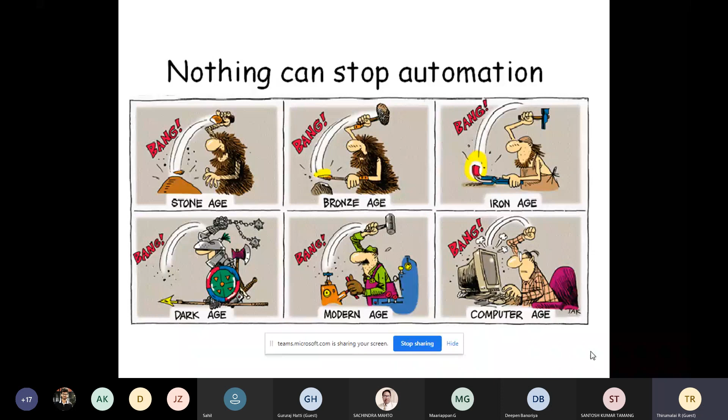And we are going to see what is meant by sustainable manufacturing, which is also called by the name green manufacturing. When we speak about green manufacturing, the combination of green machines, green manufacturing process, green products, and clean power — the combination of all these things will come under a single term, which is called green manufacturing. This green manufacturing is also given other terms, called eco-facturing or eco-manufacturing.

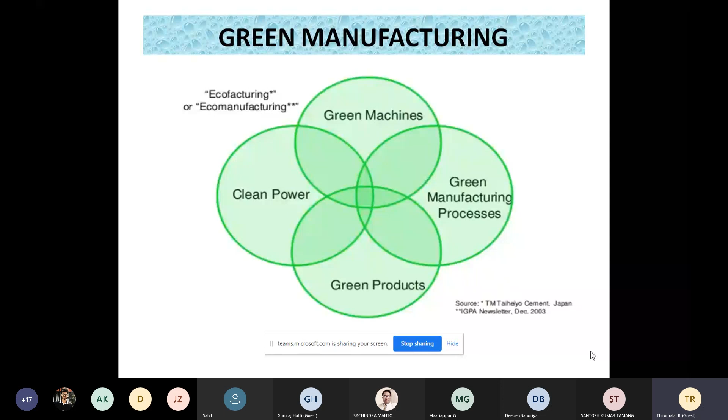So here the sustainable manufacturing concept comes into the picture, which stands on three different pillars. The first pillar is the social pillar, the second one is the environmental pillar, and the third one is the economic pillar.

When we speak about the economic pillar, we should see how far waste management is taken care of in manufacturing industry, how energy consumption is being done, and in what way we can reduce the manufacturing cost so that we can improve the manufacturing process.

When we see about the social factors of sustainable manufacturing, it speaks about the operational safety of an employee working under the industry, and we should speak about the personal health, how far it is being improved or taken care of by the industry for the employee.

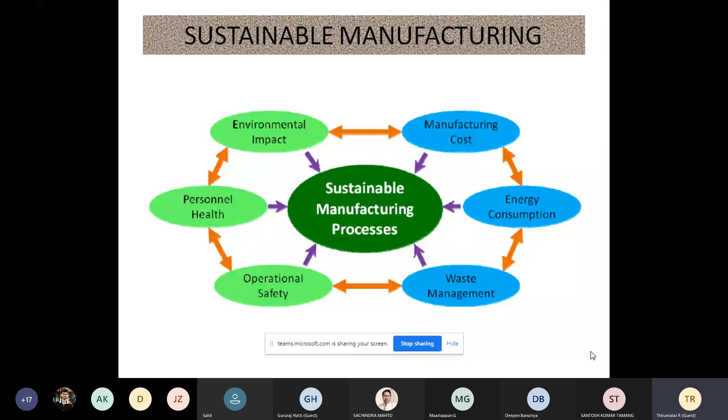And then finally, when I speak about the environmental impact, it will also have a higher impact, higher influence on the sustainable manufacturing process.

Then we will find out what is the concept of sustainability and sustainable manufacturing. So sustainability stands on three different pillars: one is the social pillar, second is the environmental pillar, and third is the economic pillar.

The sustainability process will provide less damage to the environment. It will pay more attention to society, and it provides economic benefits also. So everything we are taking from the earth, we are going to leave it to the earth also.

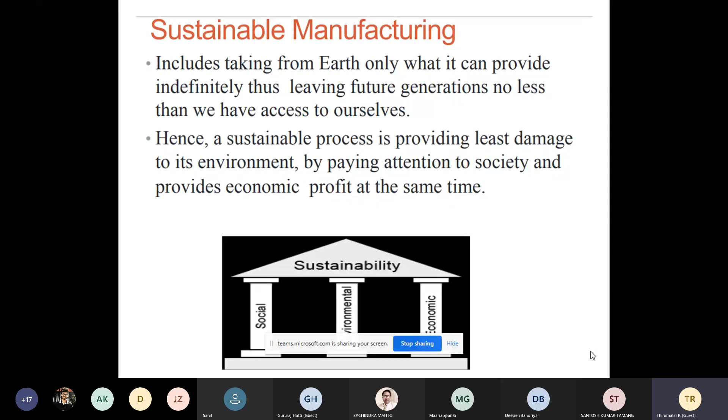So we should be concentrating on three different factors to achieve sustainable manufacturing. The first one is social manufacturing, the second one is the environmental factors, and the third one is the economic factors we are going to concentrate on.

This is the evolution of sustainable manufacturing. We can find how far sustainable manufacturing has evolved from its existence. Traditional manufacturing started in the year 1980, and the process of manufacturing started from there.

It started in the year 1980, and in its process we can find only a gradual growth. In all these things, manufacturing phenomena in several aspects took place. It started from turning, machining, milling, until the concept of smart manufacturing, CNCs, automations - everything is taken into consideration.

After traditional manufacturing is taken into consideration, there comes the concept of lean manufacturing. When I speak about lean manufacturing, we always concentrate only on waste reduction techniques - how we can reduce the waste so that we can improve the environment.

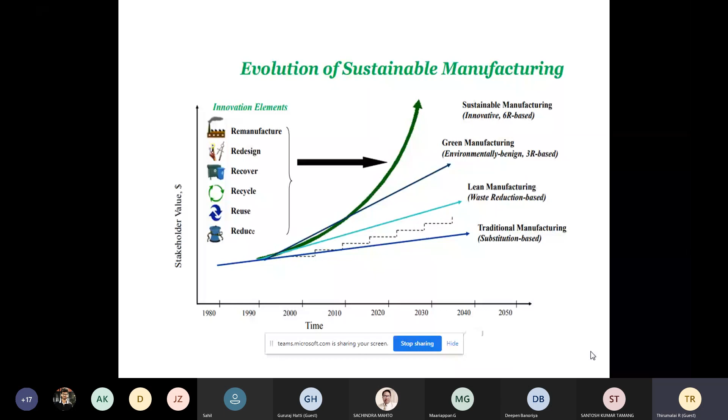Then comes the pillars of sustainability: environmental, where we cover the planet; economic, where the minimization of cost involved in the production process will be reduced; and societal benefits, how we can improve the employees' health and morality. All these things come into the picture of sustainable manufacturing.

Then comes the difference between sustainable manufacturing and generalized manufacturing. When we speak about manufacturing, we have mechanical, physical and chemical processes to modify the geometry, properties, and appearance of a starting material, making it into a new finished product or part. Manufacturing has several processes - for example, in a turning process, initially we will have the raw material.

The raw material will be entering into the industry, and the geometry of the raw materials will be totally modified, and the properties will be totally modified, and the final shape of a particular product will be given to the raw material. Thereby, I can say that manufacturing has been done so that we can obtain a new finished product.

Whereas sustainable manufacturing speaks on the basis of manufacturing. Along with the basis of manufacturing, it also speaks on several aspects, which state it should be non-polluting, it should conserve energy and natural resources, and it should be economically sound and safe for the employees, communities, and consumers.

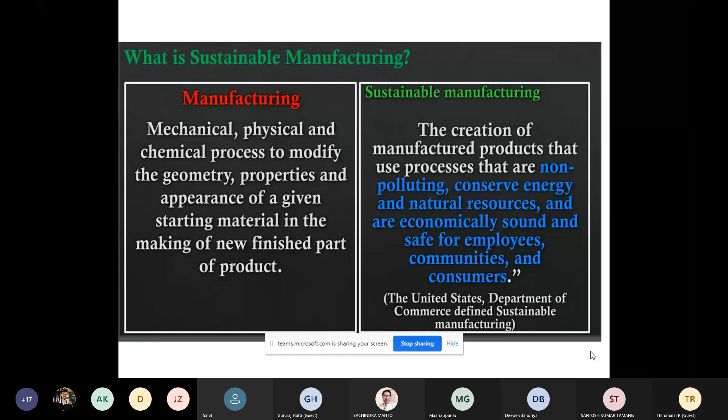Along with that, it speaks on environment, how far we can improve the environment, how far we can improve the social aspects for the people who are working in the industry, and it also speaks on the economic parts, how we can maximize the profit for an industry. So the sustainable manufacturing process generates a minimum quantity of waste.

This is what we are speaking of in lean manufacturing. In lean manufacturing, waste reduction is the general philosophy. Similarly, the minimum quantity of waste is to be decreased in sustainable manufacturing, and we will demonstrate how far we can improve the environmental performance and energy efficiency, thereby improving the societal impact, that is safety and personal health of the employees also.

Sustainable manufacturing is a branch of sustainability that deals with economic, environmental, and social objectives of manufacturing activities.

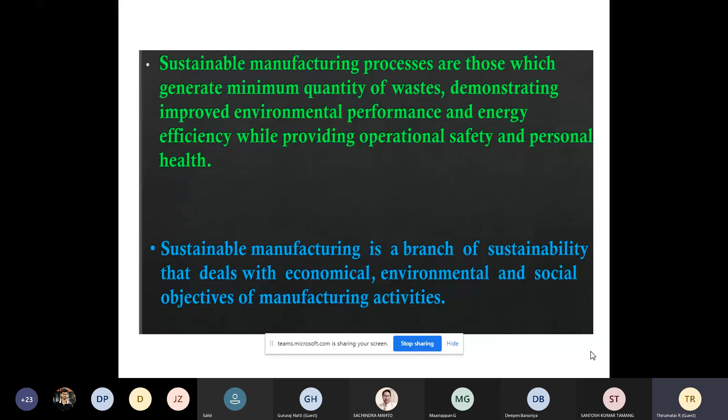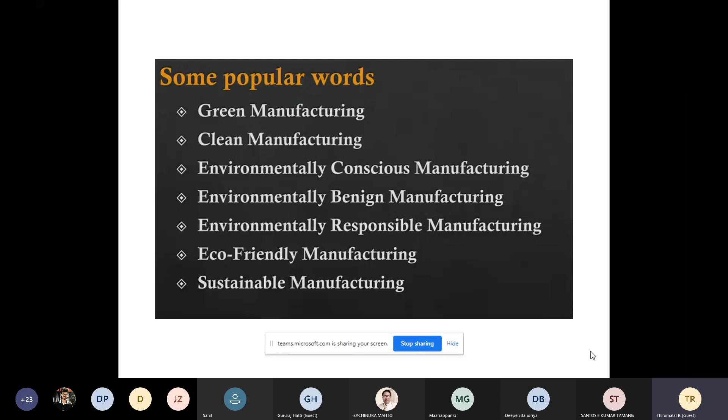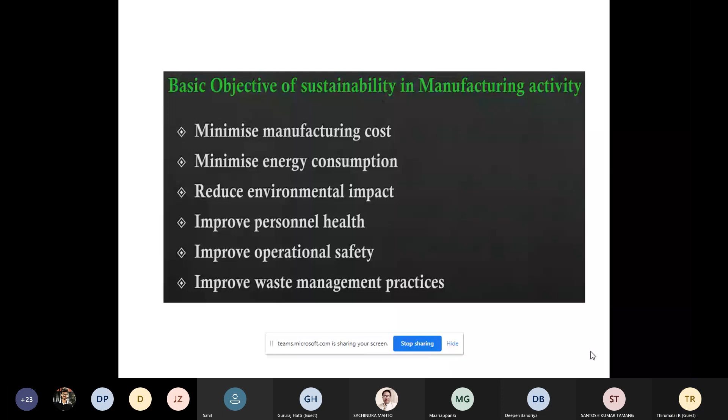The objectives of sustainability in manufacturing speak on how far we can minimize the manufacturing cost, how the energy consumption can be minimized, how we can reduce the environmental impact, how we can improve personnel health, how operational safety can be improved, and how waste management practices can be improved.

There are certain indicators for sustainable manufacturing. As said earlier, we have only three pillars: one is economic, another is environmental, and another is social. There are some indicators for this sustainable manufacturing also available.

When we speak about the economic performance, the several indicators are manufacturing cost, energy cost, quality of products, production efficiency, productivity, technology, and supply chain network. So how do all these economic performances become indicators? We will see one or two examples.

When we go for manufacturing cost, definitely the cost of manufacturing should be very lesser. I cannot say I have achieved sustainable manufacturing by improving the investment for manufacturing, by increasing the cost for manufacturing. When the cost of manufacturing is highly increased, there is no point in saying that sustainable manufacturing has been increased. So I should say that the manufacturing cost should be reduced.

I should say that the amount of energy consumed for doing a product should also be reduced. I cannot say that by using a higher amount of energy, I can achieve sustainable manufacturing. There should be no compromise in the quality of products. When we are doing a product with a high compromise on quality, automatically the products will not work properly, and ultimately sustainable manufacturing will become a failure.

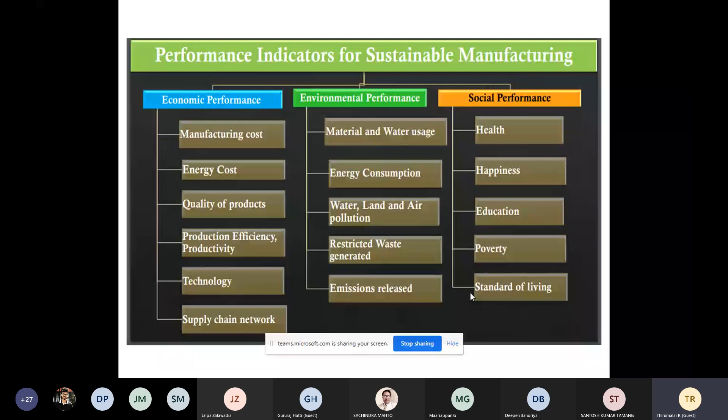Coming back to the previous slide: the energy cost, along with parameters of environment and social performance. We can find out how the energy is consumed in manufacturing a raw material into a finished product, what is the production energy during the production process, how energy is consumed in maintenance, in transportation, in facilities, and how renewable energies are being used.

Collectively I take all these parameters as an index. We have rubrics and templates, so all these indexes are calculated, and the energy consumed before and after the implementation of sustainable manufacturing will be measured and compared, to find out how far the energy consumption is reduced by implementing sustainability.

Similarly, I can find this out for environment. The indexes are: I calculate energy, usage of water, restricted material usage inside the industry, how disposed waste is carried out, and how far noise pollution is reduced. When I measure all these indicators before and after implementing sustainable manufacturing, I can calculate the environmental impact.

Similarly for waste management, the indexes are consumables, packagings, used raw materials, and how scrap parts are measured before and after sustainable manufacturing implementation. When the amount of scrap is reduced, I say there is successful implementation of sustainable manufacturing.

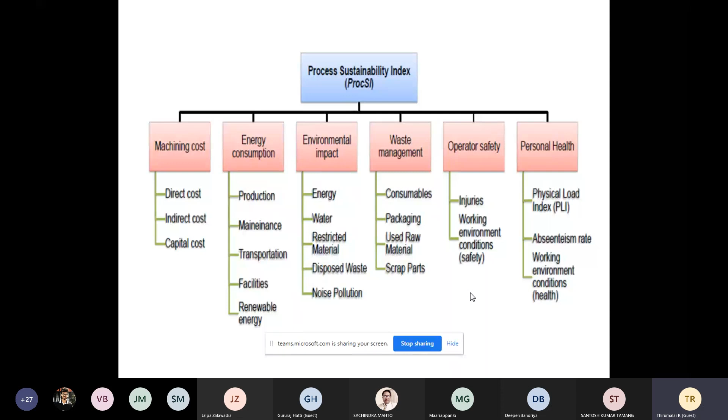Then comes how we can implement sustainable manufacturing in an industry. How can we implement it? Here we will emphasize developing technologies and methodologies.

When I reduce the emission of greenhouse gases, use clean energy, improve energy usage, and reduce non-renewable or toxic materials and waste byproducts - all these things collectively - I can say I am able to implement sustainable manufacturing when I want all these implemented in the industry.

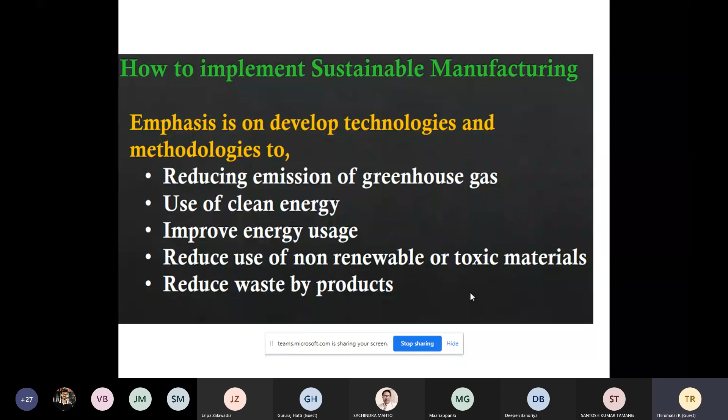Several industries' top level management have complete control over whether they can implement sustainability in their manufacturing. When they want these objectives carried out - to reduce greenhouse emissions, improve energy usage, reduce waste byproducts - the only solution is to implement sustainable manufacturing.

How is sustainable manufacturing brought into practice? We will use renewable materials which are not depleting the natural environment, and these input materials should be non-hazardous and should be recycled.

After this, I move to the production unit where I can modify the production process to use a lesser amount of energy. The first two factors speak on environmental parameters of sustainable manufacturing, and the third speaks on the energy factor - I should use a production process that uses lesser energy and water, and produces lesser waste.

Once the product has been finished inside the industry, it moves to the packaging industry. It has to be sent out for export or other purposes. Packaging is a very essential phenomenon in manufacturing, and it should use the lesser amount of packaging material, lesser weight, and provide excellent logistics and efficient transportation.

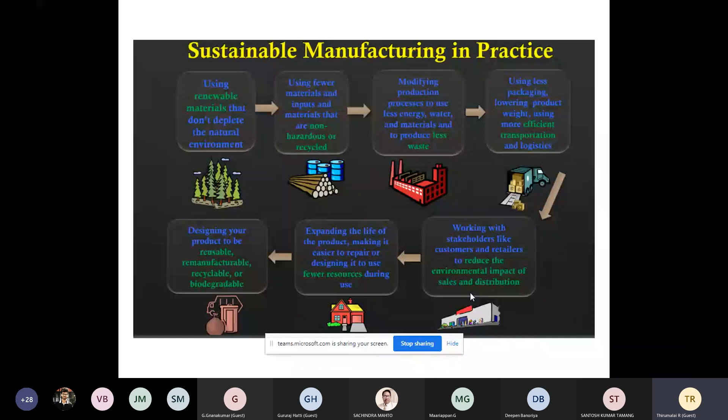Then comes the implementation, the scales of sustainable manufacturing. We can find a scale here with 5 different cards. Under these cards, we can find one scale is generally easier, and the second scale is more difficult. So it is very easy to have housekeeping.

It is very easy to implement housekeeping when implementing sustainable manufacturing, and it's easy to optimize. Housekeeping means making improvements in work practices, and then going for better maintenance. In process optimization, I will make certain adjustments and newer methodologies to increase the efficiency of the manufacturing industry.

But the tougher side is raw material substitution. I should provide raw materials that are environmentally friendly, because nowadays I should shift the raw materials from one type to another, such that they are eco-friendly materials. This will take a much larger amount of time for the manufacturing industry to cope with.

Then I should adapt my industry to newer technologies so I can reduce waste and reduce energy consumption. This will involve a higher amount of investment. Finally, I should go for new product design to minimize impacts throughout the product life cycle. So these three cards are a bit tougher for the implementation of sustainable manufacturing.

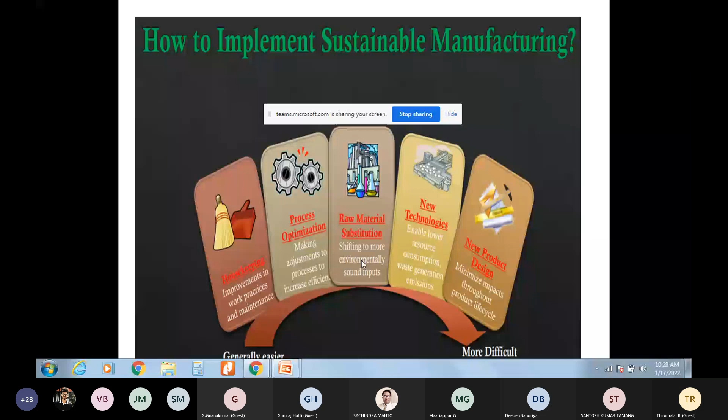Then comes the concept of smart manufacturing. Whenever I speak about sustainable manufacturing, we always consider three parameters: the social impact, environmental impact, and economic impact of an industry. This leads to the newer technology of manufacturing, called smart manufacturing.

So Industry 4.0 is in existence now. We had industry 1.0, 2.0, 3.0, and now we are in industry 4.0.

In industry 1.0, mechanization was in process - the development of steam engines, hydro energy resources, agriculture industries, weaving looms, textile industries, everything came into existence in industry 1.0. It started in the year 1784 and lasted around 80 to 90 years, where high advancements in mechanization, steam power engines, weaving looms, textile industries, and agriculture all rose to a certain level.

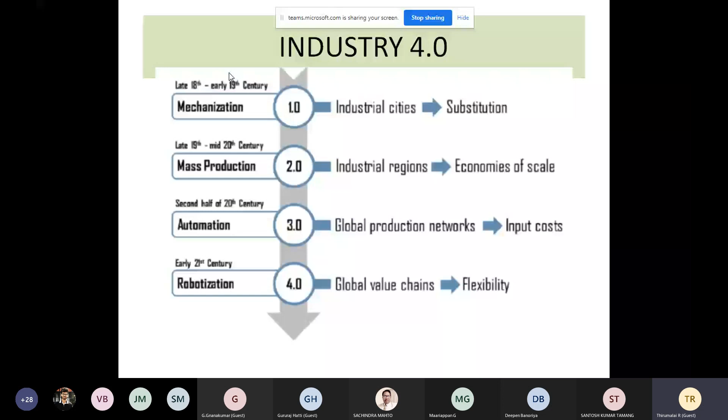In Industry 3.0, we move towards a global production market, and it is purely automated. In Industry 4.0, it is robotization, where global value chains and flexibility are considered. And for Industry 4.0, there are the products.

There are several products associated with Industry 4.0. In all these cases, these products should be intelligent enough, highly connected, and responsive. We will have machine-to-machine communication devices that interact and exchange data from cyber physical systems. Products associated with Industry 4.0 should be equipped with sensor technology, having a higher affinity towards it, giving away condition information about the products and their environment. All smart products should be equipped with autonomous decision making and self-learning processes. These are the products where the principles of Industry 4.0 lie.

There are 6 main design principles of Industry 4.0: interoperability, virtualization, decentralization, real-time capability, service orientation, and modularity.

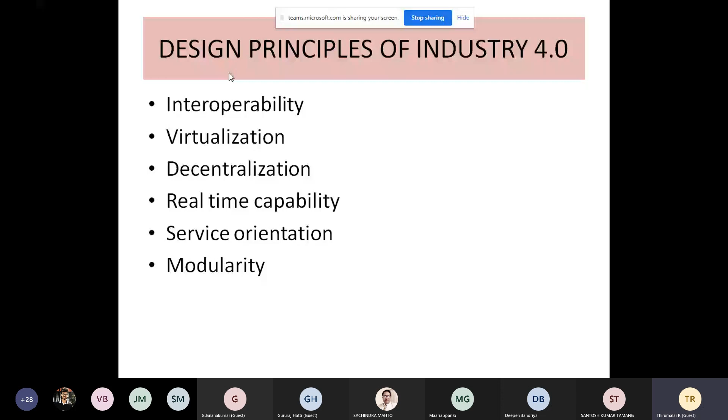So what is meant by interoperability? Interoperability is the ability of cyber physical systems, humans, and smart factories to connect and communicate with each other via the Internet of Things. It is very simple: we have several systems, factories, and cyber physical systems, and all these should be connected together and communicate with each other via Internet of Things, that is the Internet of Services. We have ERP, supply chain management, logistics, manufacturing, and robots, everything should be interconnected together. That is called interoperability.

So we have information technology and operation technology convergence, that is IT and OT convergence. Internet of Things, information technology, and operation technology should be converged together. And then the people, the protocols, the standards, everything should be connected together. That is called interoperability.

And then virtualization. Before real manufacturing takes place, I should go for digital production. I can do all these things by means of providing cloud-based manufacturing.

By providing cloud-based manufacturing through implementation of several sensors and other cloud technologies, I can connect my suppliers, my logistics, and my computer servers, everything to the cloud. So when it is connected to the cloud, I can say that digital manufacturing is being established here.

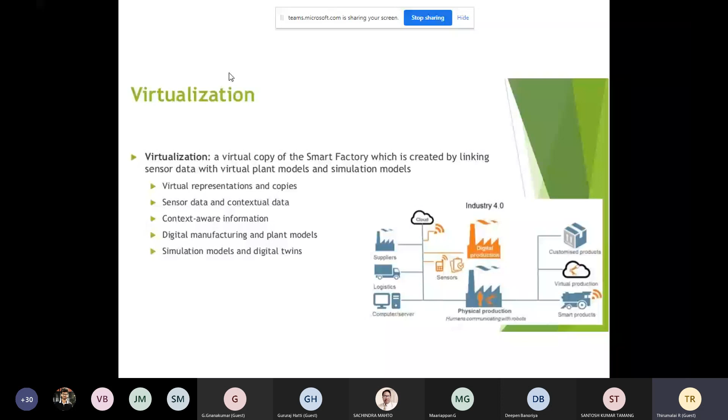Then it speaks about decentralization. It is the ability of the cyber physical system within the smart factories to make decisions on their own. So they should take autonomous decisions, semi-autonomous decisions, and be intelligent towards the edge, and have a higher amount of deciding authority.

For example, when a manufacturing industry is carried out, when the products are produced in plenty and these products are to be sent to the warehouse for storage, this decision should be taken by the computer itself. They will check out the amount of production parts carried out in the industry, then call up the logistics systems, and this logistics system will automatically send guided vehicles to transport these finished parts to the warehouses, and from the warehouses they will send it to sales and other marketing avenues for the products to be sent out from the industry. So we will not employ a person to carry out all these things.

What we will do is everything will be decided by the smart manufacturing industry itself. For example, when the raw material is scarce, when I want to find a tool, a coolant, or a lubrication, all these things have to be automated. A semi-autonomous decision should be taken up by the system itself.

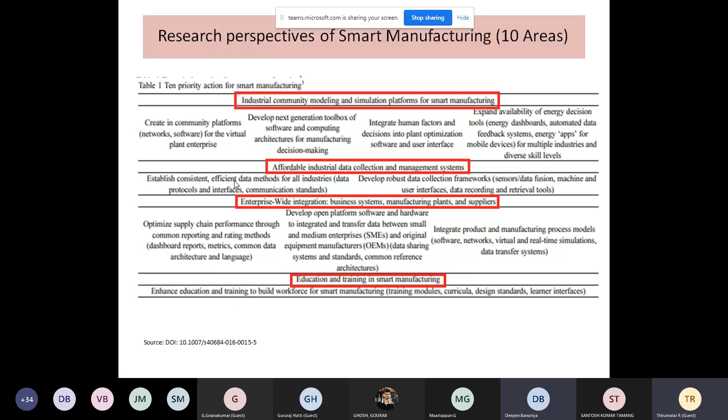And we have several avenues under all these headings where we can carry out research in smart manufacturing. As established by the National Institute of Standards and Technology, we have several smart manufacturing research programs conducted. I have shown you four highlighted programs given here.

This is given by NIST, National Institute of Standards and Technology, where smart manufacturing system design and analysis program is there. We have a smart manufacturing action plan, robot systems for smart manufacturing, and measurement science for additive manufacturing.

And then measurement science for additive manufacturing. So when you speak on smart manufacturing, I will speak about the methodology, modeling methodology, real-time data, performance assurances, reference structures. All these things will be taken care of.

When I speak about smart manufacturing action plan, then I will be speaking about wireless platform, digital threads, cyber securities, interoperability, execution management. All these things will be taken care of.

When I speak about robot systems for smart manufacturing, I will speak about the framework for robot systems, and the performance of the robot system, agility, and interoperability and integration of robot systems.

And then finally, measurement science and additive manufacturing. I will speak about the specialization of material for additive manufacturing, verification of material for additive manufacturing, real-time control, and system integration and interoperability for additive manufacturing.

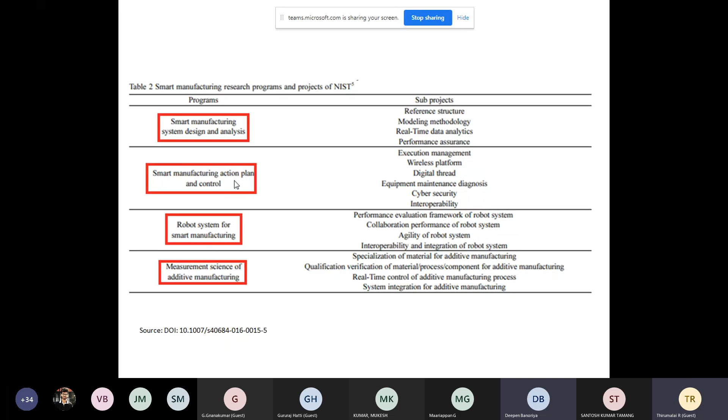So all this speaks about the avenues we have in smart manufacturing and what projects we can carry out in this manufacturing process. For example, when you take a robot system, I can see how to find an evaluation framework for how a robot works in smart manufacturing. I can assess how collaborative performance of a robot system can be analyzed, and how this robot system can be integrated into smart manufacturing. All these are sub-projects where I can say this can be integrated and analyzed. Again, I have given you the source here, so through the source only I have taken all this information.

That is, when I go for innovation, now we are not speaking about networking, cloud computing, or smart manufacturing itself. Now we are speaking about how innovation can be done in smart manufacturing. So here, in the case of smart manufacturing proliferation, I can go for innovations in developing smart manufacturing technologies. I can do innovation in reinforcing manufacturing soft power. I can do innovation in promotion of production facilities.

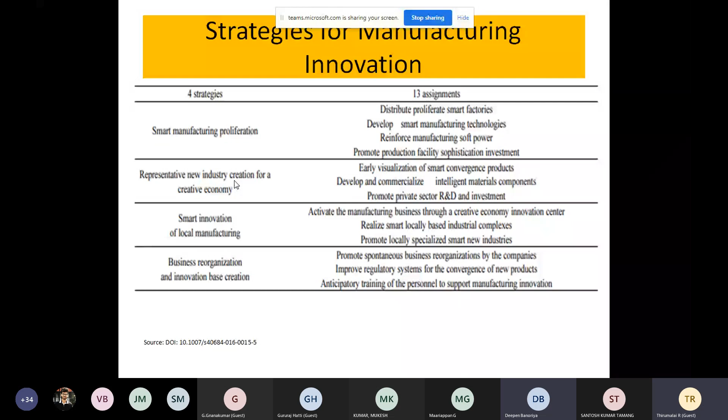So business reorganization and innovation base creation can be facilitated. I should promote spontaneous business reorganization by the companies, and I should improve the regulatory systems for the convergence of new products, and anticipatory training of personnel should be facilitated.

And these are the components of smart manufacturing. We can find there are several components associated with smart manufacturing. So we will start with cyber physical system.

We have artificial intelligence, we have cloud computing, we have big data, and then we have additive manufacturing, virtual reality, simulations, flexible manufacturing system, and then augmented reality.

What does all this mean? So when you take a cyber physical system, all my components, my measuring equipment, my manufacturing equipment, my logistics, my buildings, everything should be associated with smart techniques. That is called a cyber physical system. When I say cloud computing, all the data associated inside my industry should be saved separately in a cloud computing device, which should be retrieved by the manufacturing industry and also by the user collectively whenever it is required. Big data.

The storage of all the information should be easily retrieved and stored in a physical system. Additive manufacturing is a new method of manufacturing in which the amount of waste generated in a normal manufacturing industry is totally eliminated. We can go for a high amount of complex parts to be manufactured, and also in additive manufacturing there are more research avenues available, and it is highly connected to the smart manufacturing scenario.

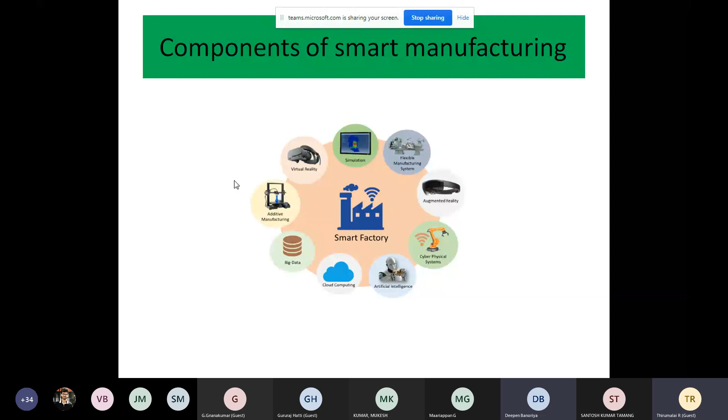So I should have a high virtual reality capability. I should go for a higher amount of simulations through CAPP and CAD. And after doing all these things, the manufacturing system should be highly flexible so that I can change the design of the systems I have over here. I can go for a higher amount of modularity and flexibility in my manufacturing process.

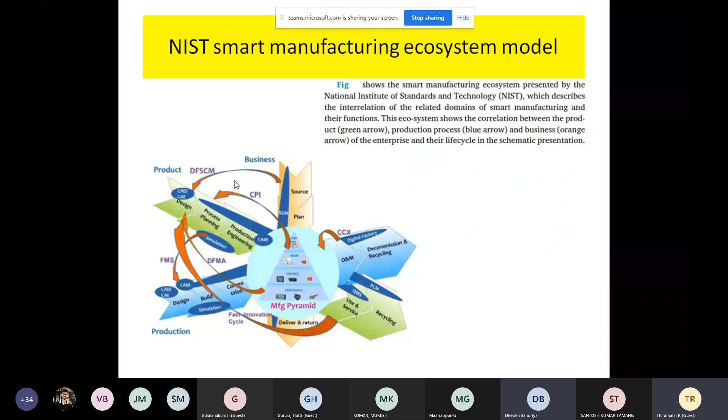We can find it here: FMS, DFMA, CCX, CPI, DFSCM, fast innovation cycle, everything is there. These are the components of NIST. What do they do?

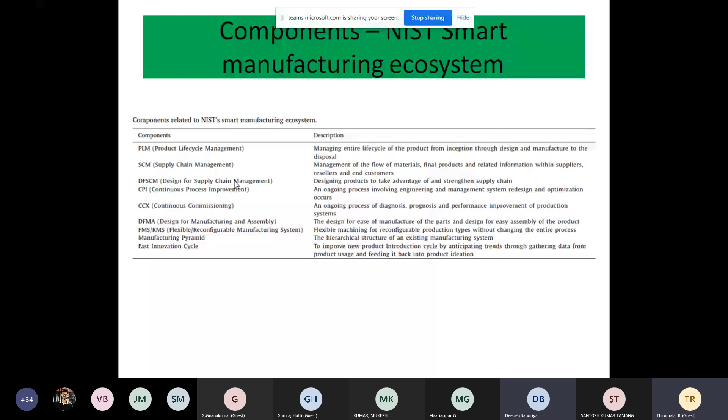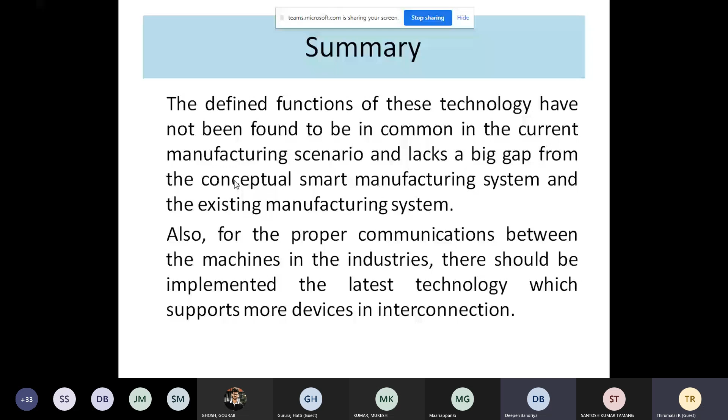For proper communication between machines in the industries, we should implement the latest technology which supports more devices in interconnection. So this is how we can find out the smart manufacturing and its related scenarios in the present world. With this, I conclude my section.

Thank you so much, sir, for your wonderful session. Thank you for opening the session for queries. You have really provided an in-depth look at smart manufacturing, its scopes, and research challenges. So now I request participants, if you have any doubt, please ask sir. The session is open for discussion now.

Yes. There are three different parameters in sustainability: one is social aspect, second is environmental, and third is economic aspect. Social aspect speaks on the persons working in the industry. For example, when a person working in the industry is happier, automatically the production rate improves. When the health of the employee is very good, automatically the production rate improves. So sustainable manufacturing speaks on the social aspects, meaning how we can improve the health of an employee, how we can improve the continuous learning process of an employee, how we can improve the happiness of an employee. That is what is called the social impact of sustainable manufacturing.